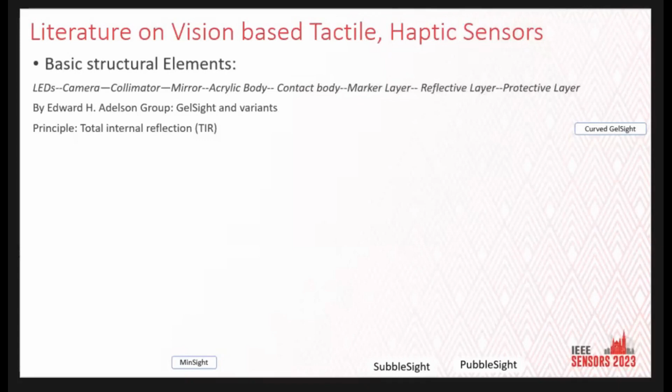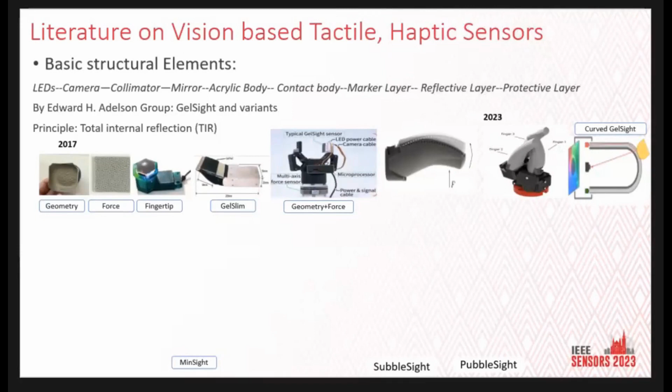And this is some literature which has been done from 2017 to 2023 by the Adelson group. So these are called GelSight and its variants. Similar work is done by Katherine's group, which basically changes the intensity of the light when you apply the force on the elastomer. Yeah, so this is the elastomer, and here if you apply any force, the intensity of the light will change, which can be captured by the camera.

So currently we have developed this one, which is called bubble SubbleSight, which incorporates a single bubble inside an elastomer. Now it can enable 3D sensing. If you apply radial, compressive or shear forces, this can sense the deformations. And another thing the bubbles do is that because they weaken the material, it can sense lower forces.

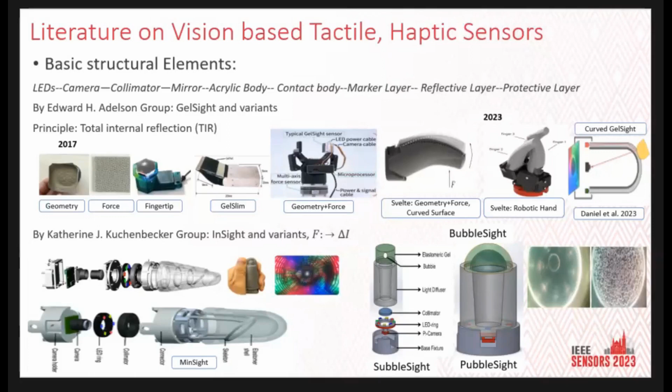So similarly you can include a number of bubbles, then that will be called BubbleSight, and it can be curved also. So this is the configuration that we are talking about. And now basically, why bubbles?

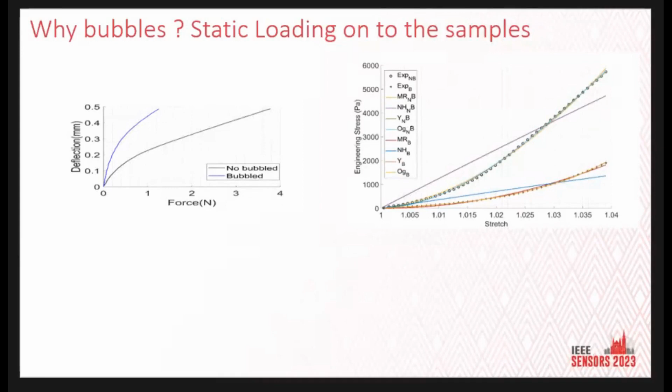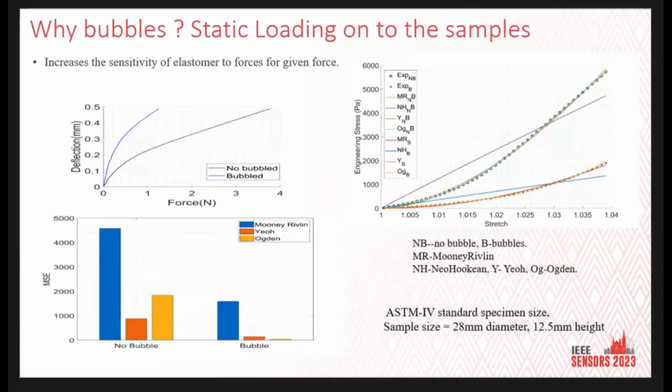Now if you do a force deflection curve with and without bubbles, you can see here for a small value of force, the deformation is higher, and we have put here different hyperelastic models, basically Neo-Hookean, Mooney-Rivlin and Ogden models, to match the characteristic, and the modulus coefficients we found from the optimization. So if you see the error from the experimental value, the Ogden and Yeoh models are performing better. So we take these coefficients for our further analysis.

Now, similarly, coming to the cyclic loading, it is observed that with bubbles it has lesser hysteresis, because the pressure inside the bubble helps the material to come back. So that also is observed in this kind of cyclic loading.

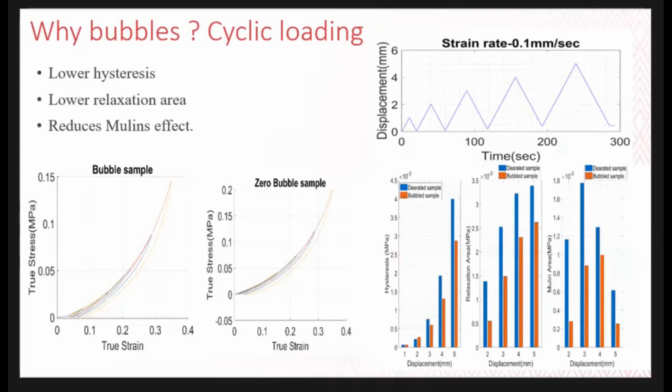So how we fabricate: basically we mix two elastomers and allow it to degas completely. For a single bubble application, we wait for the elastomer till it reaches a certain viscosity, so that when you incorporate the bubble inside, it will not come out of the surface. So that is around 3000 to 5000 centipoise.

Now this is the calibration and simulation setup where we are indenting the single bubble. So this is the bubble, and this is the indenter. Similarly, the simulation model is shown, and the parameters of the elastic model are taken from the optimization that we previously discussed.

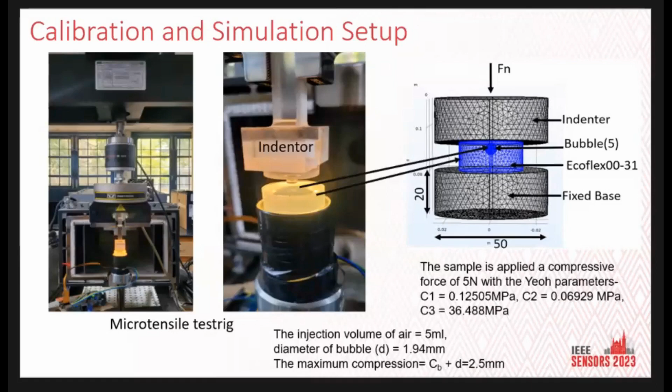And this is an application setup where we placed it on the radial artery to get the force distribution on the artery. And how the light ray is transmitted is by the principle of transmittance here. So light passes through the bubble and it gets internally reflected also. So that's how we get the boundary of the bubble there.

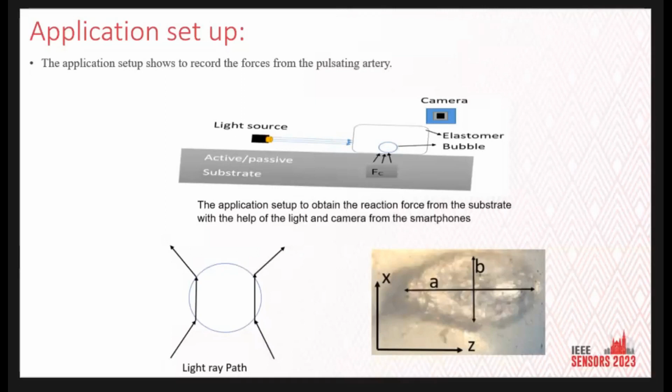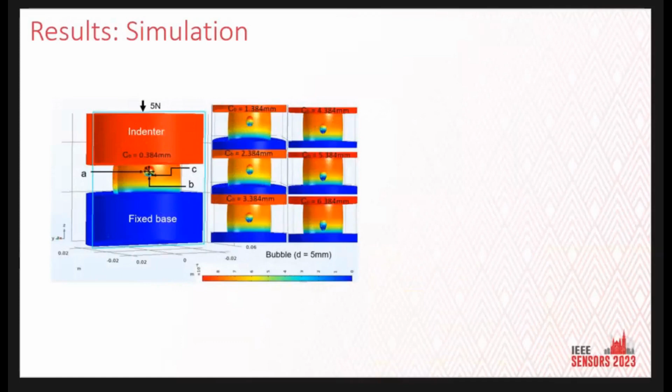So in simulation, we are trying to see the depth: if you place the bubble at different depths, how the response is. So the perimeter change is shown in this figure, when you apply force from 0 to 5 Newton with the different clearance of the bubble from the surface,

how the range behaves. Now when the bubble is placed at a greater depth, you need to apply more force to sense the deformation. So it basically increases the range with the depth. If it is at the surface, it can sense very low force.

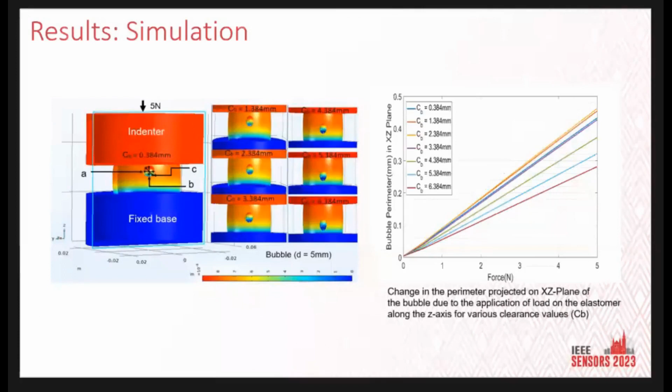Now coming to the calibration results, we have given this step input at steps of 0.5 mm displacements of the indenter, because you can control the displacement very accurately, and the force response is shown over here. You can see it's a kind of second order response, and the hysteresis also is shown here for different displacements of the indenter.

Coming to this, when you take the deformation as input and the force as output and do the system analysis, you can see at higher indentation the system behaves like a low pass filter, so it behaves like a first order system response. But for other depths, it has a second order response, and slowly the corner frequency is shifting towards left

with the depth. So it shows that the low frequencies are more identifiable than the high frequency over here. So the bubble at the surface can be very good for getting the high frequency information than at a higher depth.

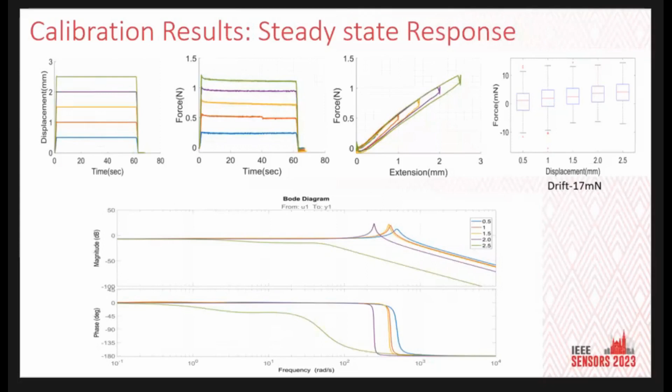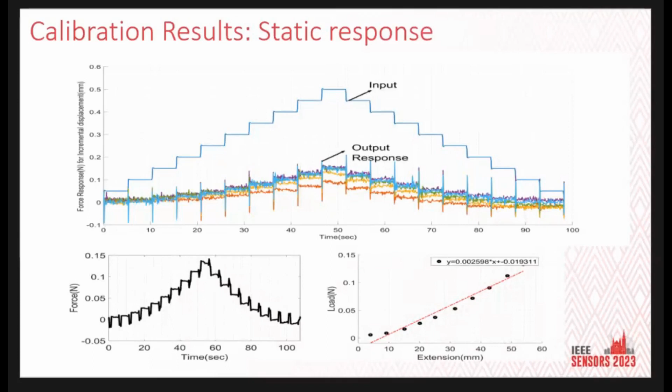So in the static response, we are deforming the gel from 0 to 0.5 Newton in steps of 0.05 Newton. The output response of the force you can see over here, which was repeated 4 to 5 times, and the aggregate result is plotted here. With the increase of the force, you can fit a linear curve to get its sensitivity, which is around 25 millinewton of resolution, and the sensitivity comes around 20 millinewton.

So this is a kind of application when you place it on the radial artery; you can see the video there. So it's kind of an analog twin of your heartbeat, which is transformed into the bubble motion. And if you plot and take the Fourier transform of the displacement vector from the optical flow, it comes around 1.3, which is pretty much the heart rate.

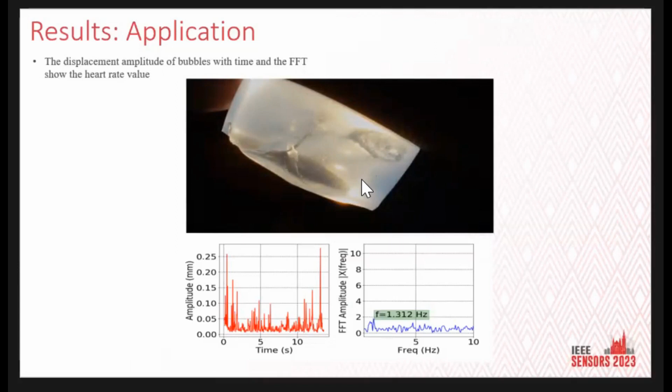And coming to the load applications, if you apply a normal load, it is going to deform like this. I'm just applying through my fingertip, and this for the radial load, and this for the shearing. The calibration is only done for the compressive load alone.

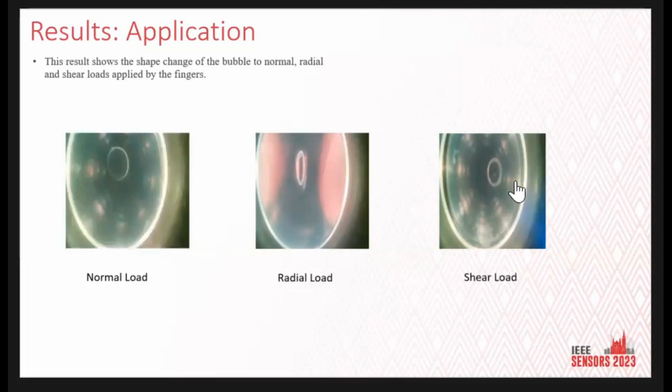So in conclusion, as the depth of the indentation goes beyond 2 mm, the bubble behaves as a first order response, as we observed from the simulation, and at lower depth of indentation the high frequency components are evident, and vice versa, from the Bode plot.

The sensitivity we observed is 20 millinewton, the resolution is around 25 millinewton, the drift is around 17 millinewton, and the range can go maximum 2.5 Newton, after which it kind of saturates. This is done for the bubble size of 1.94 mm.

And if you have a good camera with high resolution, then it can also sense force in the order of 5 millinewtons or so. And with the depth, the sensitivity decreases with the depth of the bubble, and the range can be maximized with the depth.

So the future work includes mapping these changes with respect to the contour of the bubble, and how the gel behaves when you have plural bubbles in the matrix.